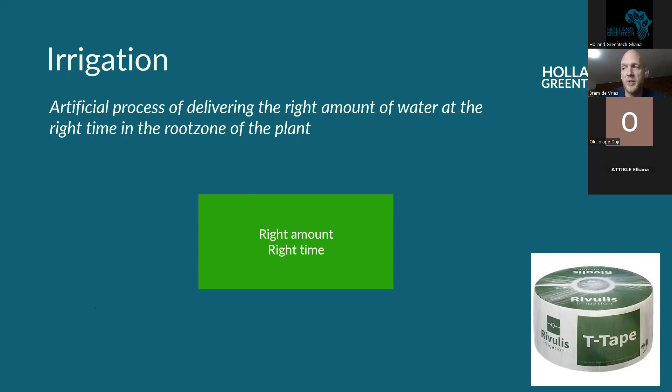So the right amount at the right time, that's where efficiency and scheduling is coming in. So if we look at how the soil reservoir works, we see that the plants have roots which are in the soil reservoir. The volume of the soil reservoir depends on the crop stage, and basically the rooting area. So the deeper the roots, the bigger the reservoir of the soil where the plant can consume its water from, and that's where the plant gets the water.

Then water can also be lost by evaporation. So when you wet the soil and the sun starts to shine, the more area is wet on the soil, the more water will be lost because of evaporation. Then with some forms of irrigation, like furrow irrigation or basin irrigation, you can also lose water with runoff. Water can just flow from the surface out of your field, so it will not be accessible for the crop anymore. So that is another way to lose water that you try to add to the root zone of your crop.

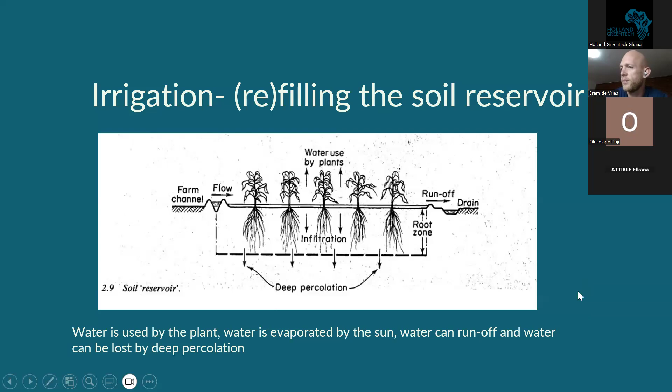So irrigation, why does the plant need the water? The plant needs the water for transpiration. Just like people, plants also need to sweat to control the temperature of the plant. Photosynthesis, of course, and growth. The plant itself holds water, so the bigger the plant grows, the more water it will hold. It's also structural support: the turgor, the cells need water for structural support. That's why, if a plant is drought stressed, you see the stems and the leaves start to bend, so they don't have enough structural support anymore.

An important one that should not be underestimated is the transport of nutrients and gases in the plant. The plant needs water to take up the nutrients from the soil, like your nitrogen or your phosphorus. Flow of water from the roots into the plant, into the leaves, the fruits, the flowers, etc. is needed. So a shortage of irrigation can also lead to a deficiency in nutrients.

So transpiration is the biggest contributor to the water consumption. This really controls the flow of the water through the plant, and is the biggest one. So a healthy plant needs to be able to transpire enough water.

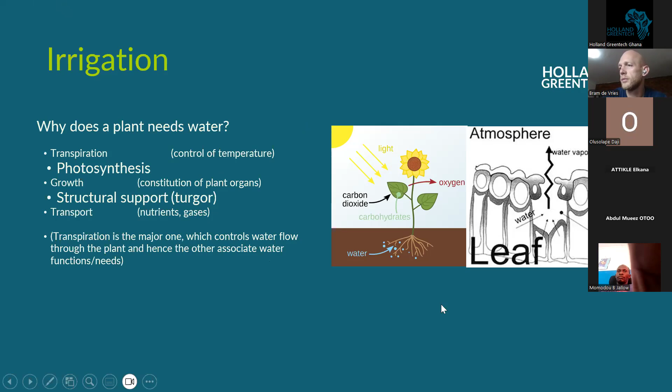Sometimes the presentation doesn't continue with the screen, so I hope you're now on the slide of too much water. Otherwise, I have to start sharing my screen again.

So too much water. It's also possible to irrigate too much. We see it a lot with farmers we visit, also with drip irrigation. So what is the problem if you irrigate too much? One, it's of course water loss. If you have a farm with limited amounts of water and you irrigate too much, it's a loss of your water. But it's also an energy loss. You may use electricity or fuel to pump water onto your field, so every cubic meter of water that you lose is also a certain amount of money and energy that you needed to get that water there. This can be quite significant.

Too much water, you have leaching of nutrients; especially nitrogen leaches quickly. So this is also a loss of money. You don't want your expensive fertilizer, or the nutrients that are already in the soil, to leach out. You have more risk of diseases, especially in the soil, so fungal and bacterial diseases.

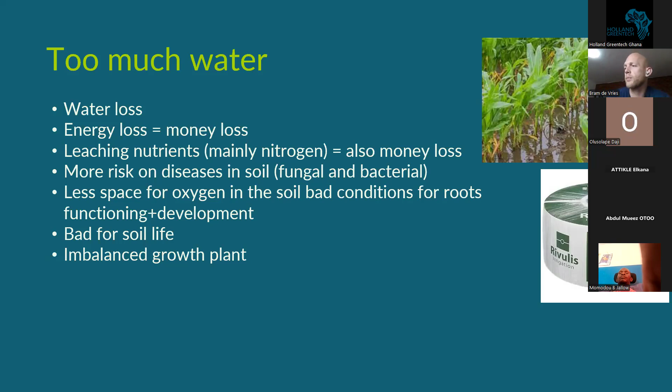Now, if there's not enough water, the plant will be stunted. You have small leaves, you have a weak stem, the root system will not develop well. So a weak plant is also more prone to pests and diseases. Just like as human beings, when we are strong and healthy, it will also be harder for a virus to make us sick.

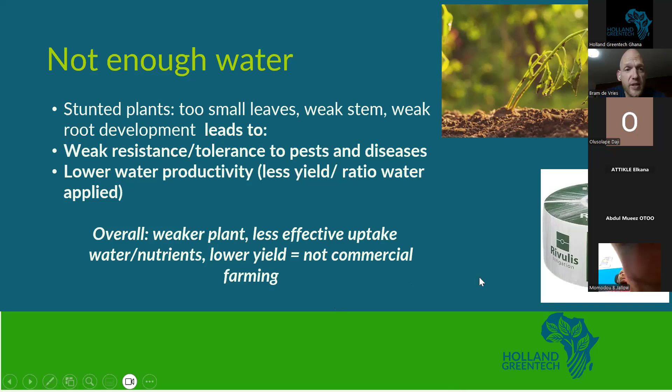Also, the water productivity, so less yield compared to the ratio of water applied, would take place. So overall, a weaker plant, lower yield, and you would not really do any commercial farming. So if you want to irrigate efficiently, which is one of the topics of this webinar, we need to know how much water the crop needs. There are different ways how this can be calculated. I'm not going into too much detail of this. We don't have time for that, unfortunately.

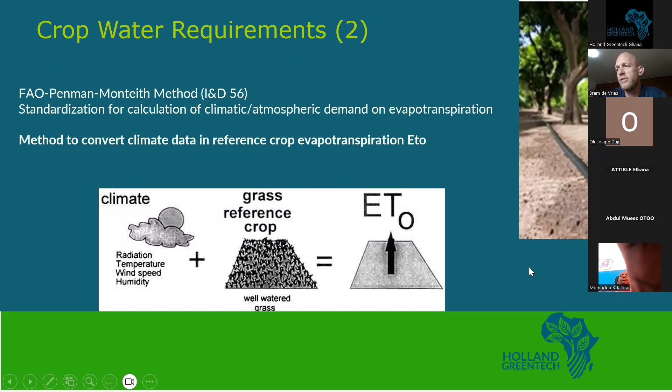But one method which is defined by the FAO is one of the leading methods that uses a reference evapotranspiration. So it uses a reference evapotranspiration of like a grass that scientists tried on different places in the world, depending on the radiation, temperature, wind speed, and humidity. And then when you know the reference ET, sometimes with a satellite, for example, you could get that, or with a weather station, you can get that.

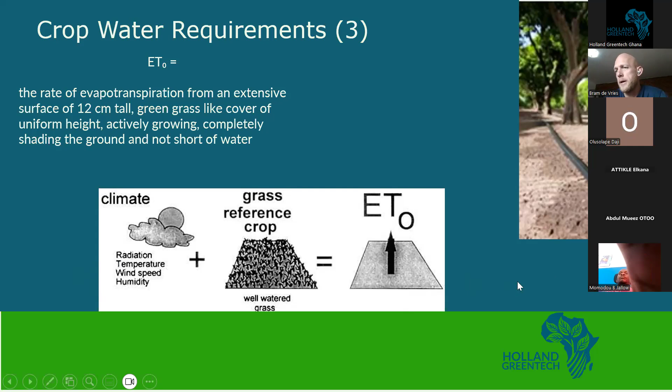You can make this crop specific by multiplying this with a crop specific factor, which we call the KC factor. So that's a crop specific factor. And so the ET0 is not dependent on the crop, that is just dependent on the environment. Then if you multiply that by the KC factor, we get the evapotranspiration.

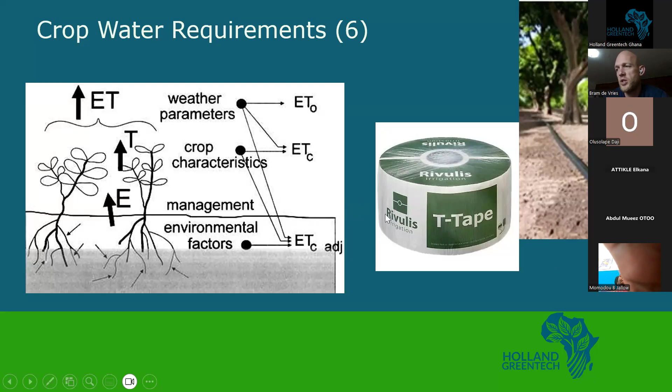So if you look at information on irrigation and you find something like ET, it stands for evapotranspiration. So if it says ETC, the C stands for the crop. So that's crop specific evapotranspiration. Here we see that formula, the KC factor times ET0. The reference crop makes the ETC, which is the crop specific one. Then we know how much water the crop needs. There are also other ways to determine your irrigation scheduling. Come back to that later.

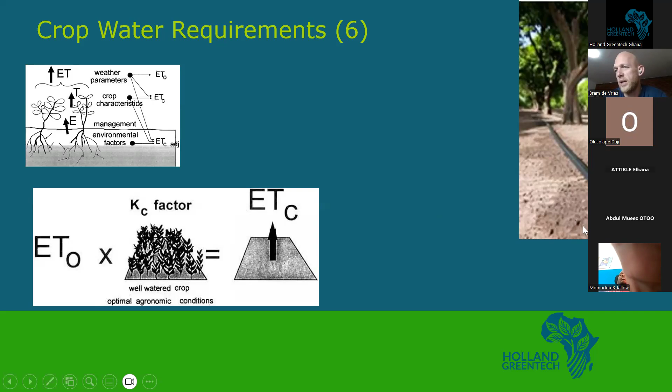So if you are interested in this, you could download this FAO drainage paper number 56, and the whole method is described in there. CropWat is a free, quite easy to use software that you could also use to calculate the crop water requirements. So you could also look for CropWat 8.0, and it's free. It's a bit of an old-fashioned program, but it works quite well. I'm not going into detail here.

So we can just look at a few practical examples. For example, tomato. How much water does a tomato plant need? You would look at the different stages, like it's a seedling stage, the plant is in a development stage, or in a full-grown crop, or it's in a late stage. That's basically when you're harvesting, or when the crop is really almost coming to its end.

So you see, of course, that when it's a seedling, it needs much less water than when it's a full-grown crop, up to 2, 3, 4 times more water is needed when the plant is fruiting, and when the plant is producing. That's when the plant needs most water, and it depends, of course, on the weather, the climate.

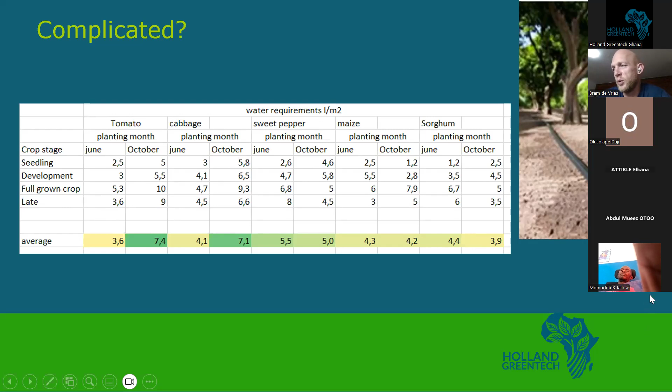A good one also to realize is that with irrigation, we often talk about millimeters of water. So 1 millimeter of water is the same as 1 liter per square meter. I don't have time to go into the details of that, but trust me on that one, that 1 millimeter is the same as 1 liter per square meter. So if we know the crop water requirements, we now come into the efficiency. So we have to look at what is the efficiency of your system.

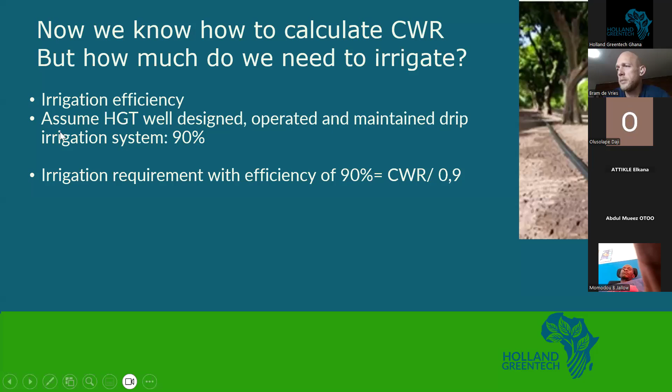So if you use, for example, flood or furrow irrigation, it's of course much less efficient. So efficiencies in practice are between 30 and 60%, which is really quite low. Imagine you're pumping water and only 30% or 40% of the water ends up in the root zone. That is the definition that we're using here for the efficiency. So from your water source, what ratio of the water that you, for example, pump ends up in that root zone. So it can only be 30 or 40%.

50% is already quite a well-performing furrow irrigation system. Okay, most of it will be lost by runoff and by deep infiltration. Then we have sprinkler irrigation. Depending on the setup, you can reach efficiencies of around 70%. A bit more or a bit less is also, of course, possible. And then we come to drip irrigation, which is the most efficient system when it comes to water and also energy, where you can usually reach an efficiency between 85 and 95% if the system is operated well.

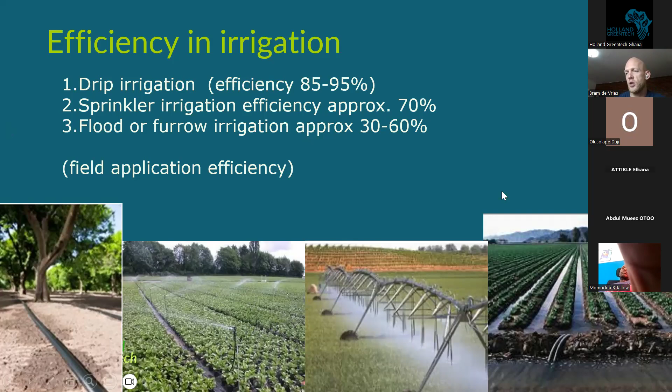So now I want to show you a video about the technical functionality of a drip line. A drip line is much more than just a hole where water flows out.

So I hope that the sound will also come with you. Maybe Elvis, you can confirm if I press play, if you also hear the sound. If not, I will explain it myself. Hello, Mr. Brown. So can you hear the video? No, there is no sound. Okay, but you can see the video? Yeah, we can see the video. Okay, then I will just explain the video myself.

So here you have the inside of the drip line. So you see water, but you also see very tiny particles that still manage to go through the filter that you have in the beginning of the system. And now you see here these black dots. That's basically a secondary filter, which is in each emitter; the water first needs to go through this secondary filter.

So you see most particles will not fit through this filter, and it will just flow further and further. You see in the T-Tape we have a very big filter area. So even if 90% of the filter is clogged, still enough water will reach the labyrinth. So here we have the labyrinth.

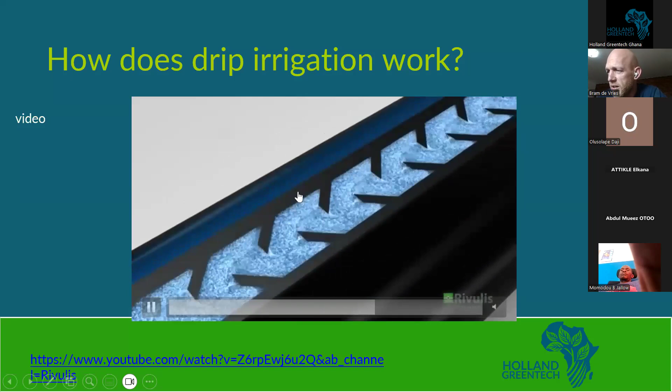So you see that the water gets very turbulent, like it's flowing more like a rapid in a river, and that makes sure that also the particles in the water cannot clog that. It will just keep going, and also it will reduce the pressure, so the water will just slowly trickle out, and it will not flow out too quickly, and make sure that out of each emitter the same flow will come out.

So now you see the outlet, which is a slit here; that's where the water gradually trickles out from. The slit also has a bigger area, so that makes it more clog resistant. So that is the technology: every drip line should have a small filter, a labyrinth, and the outlet. So those three items are included in a drip line. And with the T-Tape, you really have a drip line which is designed to be the most clog resistant drip line on the current market.

So why would you want to go for drip irrigation? It's optimal constant water distribution. It has the highest water efficiency. Small water applications are possible, so you can have a short irrigation interval. Every day you can irrigate, or twice a day. The crop itself stays dry. That's a key advantage, especially in a country like Ghana, where there's high humidity.

You don't want to wet the leaves and the flowers and the fruits every time with water, like you would with an overhead sprinkler. So it reduces the pest and disease pressure a lot. It's very suitable also for fertigation. I'll show you another video about what fertigation is and how you can do it. It requires relatively low pressure, so you need less energy from your pump.

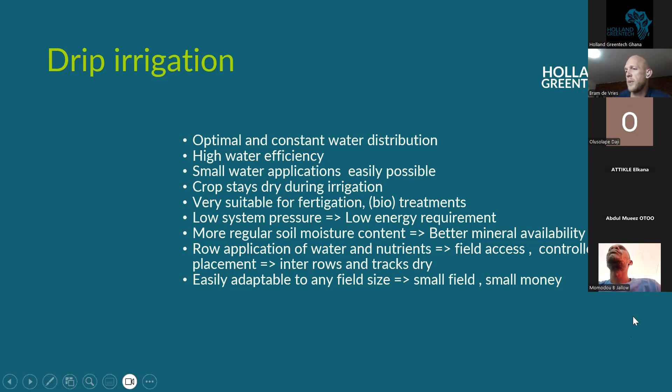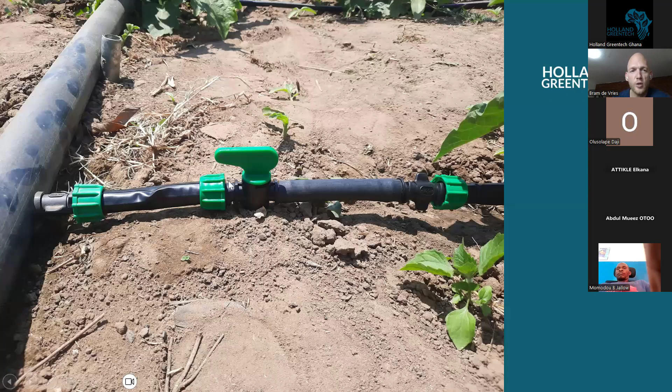You can dig the polypipes into the soil, or you could also leave them at the surface. The disadvantage of leaving them at the surface is that the sun will slowly deteriorate the materials, and the water in the pipe can become quite hot. But burying it also requires a bit more labor. So that's a choice for you.

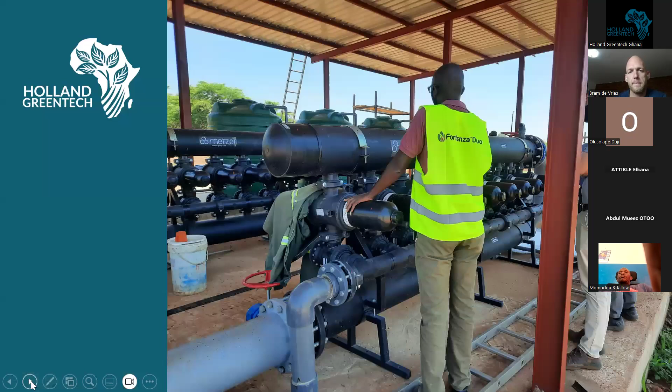Hello, Bram. No? Please, come again with a question. Come again with a question. Can we see on this picture?

Yes, we can see - filters, as someone is replying in the chat. Indeed. These are big filters, big screen filters, part of an automated system for about a 300 hectare farm.

How about this one? It's a bit harder to see.

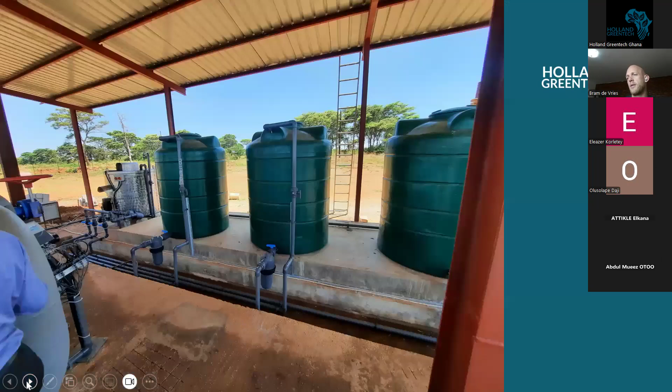So this is part of a fertigation system. Here we see the tanks where the fertilizer are mixed in. We see sand filters there. And on the left, we see the fertigation unit.

This feeds nutrients into the system. This is needed also for big systems like 200 to 500 hectares. This is very effective.

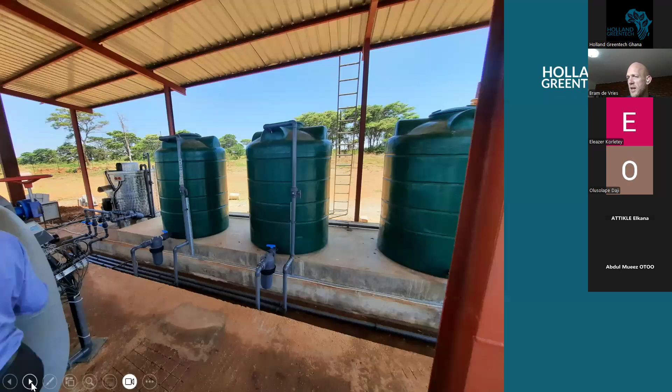So why do you want to invest in a good irrigation system? It has the potential to create optimal agronomic performance, and you need that for your bumper harvest, for more profit, save on your inputs and money.

As a farmer, there are already many risks involved. Don't take a risk of having shortcuts in your irrigation system. It's your safety system, especially with the changing climate. You can't count on rainfall anymore, and you just can't afford the risk of losing your crop because suddenly you have maybe a 2-week dry spell. So irrigation is really your guarantee.

So see it like this: if you jump from a plane, you want to have a good parachute. If you're a farmer, you want to have a good irrigation system.

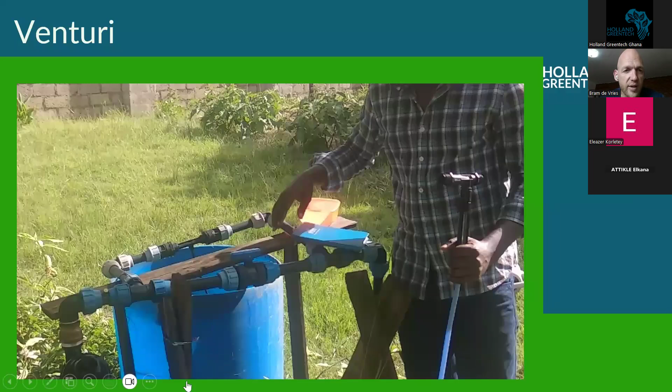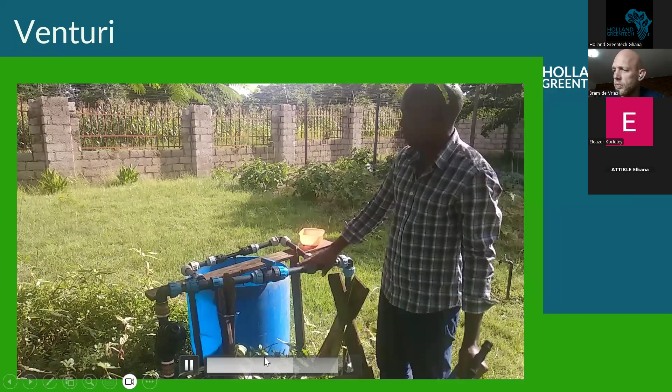In order to do that, you need some pressure difference, so you need to use a pump, the same pump as you always use. You close that valve a little bit, water starts flowing through the bypass, through the Venturi, and then the pipe will start sucking up the water. So for this type of Venturi fertigation system, you don't need an additional pump or an expensive fertilizer tank or anything.

Just for maybe $200, you can be done, and you have a very efficient system. And you can save on a lot of labor. As you know, farm workers don't like to add fertilizer into the field, so sometimes they broadcast it or don't put it properly next to the plant. Then you lose a lot of money, or fertilizer doesn't reach the place where you want to have it.

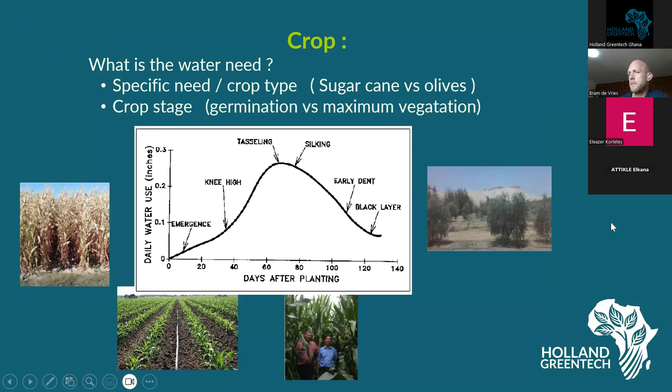The different components we can help you with selecting are like the pump, a filtration system. We need a good filtration system for a drip system so your emitters will not get clogged. We need to know the right size of the pipes, the submains, so those are the pipes going to the different fields. The manifolds, we call those the pipes where we connect the drip lines to, and then at the end we have the laterals or the drip lines.

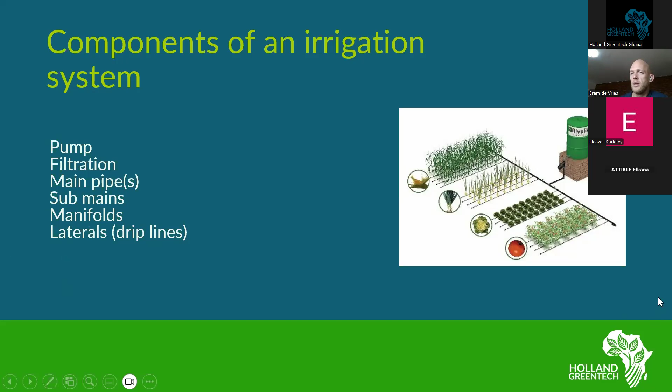Another important point of discussion is the lateral spacing, so what is the space between one drip line and the next. Usually it's good to choose a focus crop and say, okay, this crop is very important for me, for example habanero pepper or carrot. Then you select what is the best lateral spacing for that, and compare that spacing with other crops that you want to use in crop rotation, and see if you can make some adjustments. You can accept that in some fields, at some seasons, maybe for onion, it's a bit less efficient, with a bigger space of land where you don't grow anything, compared with maybe habanero pepper, where you see a whole canopy coming. So you take your crop rotation into account, please.

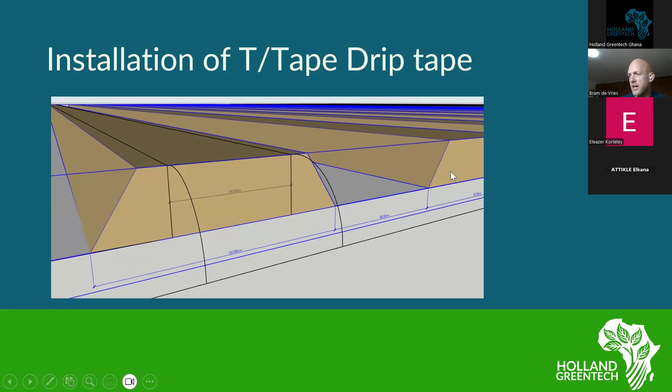This is what we mean: you would have a bed and you would put one or two drip lines on the bed, and then you have the next ridge again.

A little bit about pressure: the higher the tank, the better when it comes to pressure, because 1 meter equals 0.1 bar. So if you have a tank 5 meters high, you would have 0.5 bar. That is usually quite nice for, for example, 1 acre or 2 acres of irrigation. But 1 meter is really not advisable, because the pressure in your system will be low, and the uniformity and efficiency of your system will also be low.

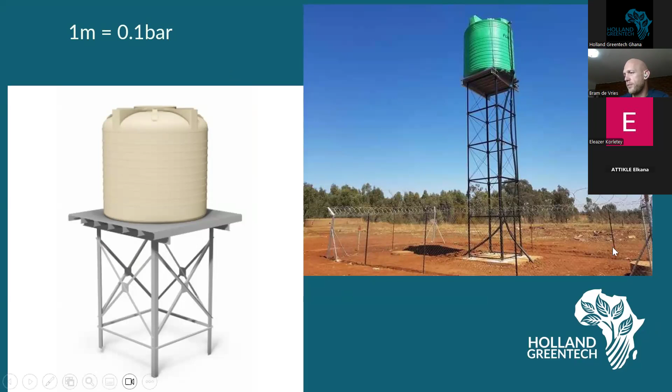When you select a pump, also please look at how much water this pump is able to pump up in a day. So determine how many hours per day can I pump. So maybe you only have 8 hours per day electricity, so you can only irrigate 8 hours per day. So calculate then how much water do you have.

So for example, if you have a pump with a discharge of 0.5 liter per second, that means that you can pump 1,800 liter per hour. So if you would pump for 8 hours, if that would be the max you can pump on a day, you can pump 14,000 liters on a day.

This is something I would really advise you to know. How much water can you pump up on a day? Because that will tell you what is the right size of irrigation system that I can use. Because, for example, with the 0.5 liter per second and 8 hours, that will not be enough for 1 acre. It will be enough for roughly half an acre, but don't start going for 1 or 2 acres. You will just not have enough water, and your crop will not do well.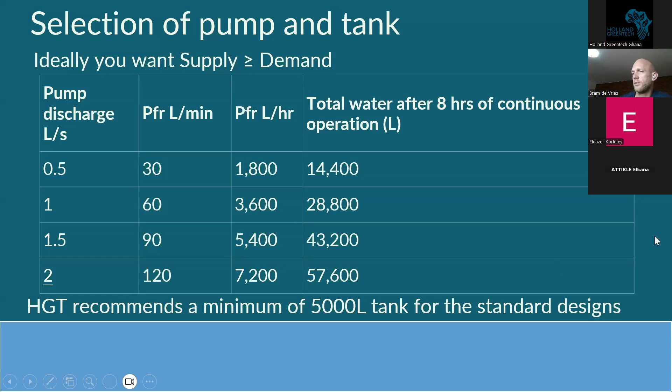If you use a pump and you know the flow of your pump is really good, it's possible to irrigate multiple zones at the same time. If you have a very powerful pump, it might even be a problem if you only open one zone because the pressure there might increase too much and the system will also not like it too much. So match the flow of your pump with the flow of your irrigation system.

Okay, there's a question here. What is the difference between a zone and a shift? For me, a zone is like a field that you can irrigate independently. So, for example, with one valve, you open it, and then a certain area is being irrigated, and that is an irrigation zone. A shift, I think maybe you mean an irrigation shift, like maybe from 12 to 1 p.m. you have an irrigation shift. Is that what you mean, Prince?

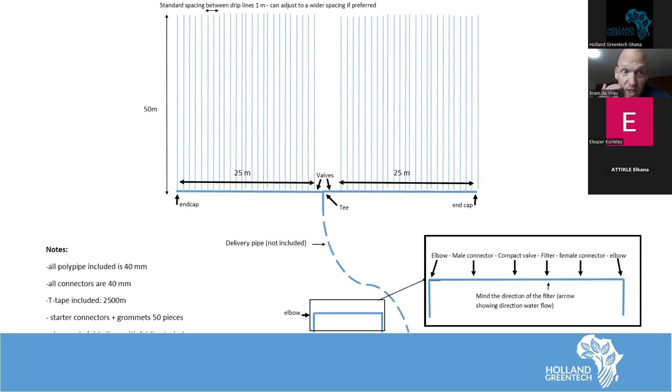So then the sum of the flow of one shift needs to be the same as what the pump can deliver at the right pressure. So that is only applicable for systems with a lot of zones. Let's say more than 4 zones or 10 zones or 20 zones. Then you look at what shifts do you have. So for a small field like this one, you could say you have 2 shifts. Shift 1 is zone 1 and shift 2 is zone 2. Then there would not be a difference in a small system.

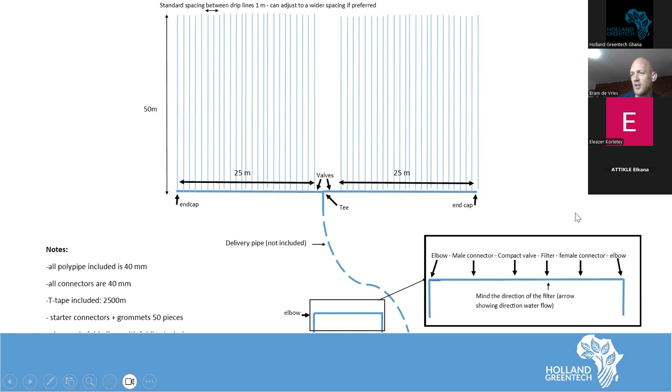So why would you want to have different zones? One, your pipe sizes can be smaller. So you save money on pipe sizes. You do need to buy a little bit more valves, but in a hectare situation, you would save money.

You can have more planting dates. It's easier to plant in different stages, like every week or every other week you plant the next field, so you have a more consistent supply. It's usually not very nice to grow, for example, 1 hectare of cabbage where all the cabbage is ready at the same time. You have a nightmare in logistics. The price at that point might just be low, so it's better if every 2 weeks you plant a quarter of a hectare. You would have a more secure business case.

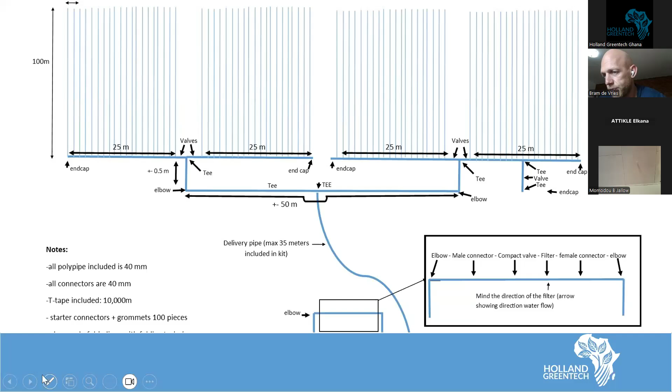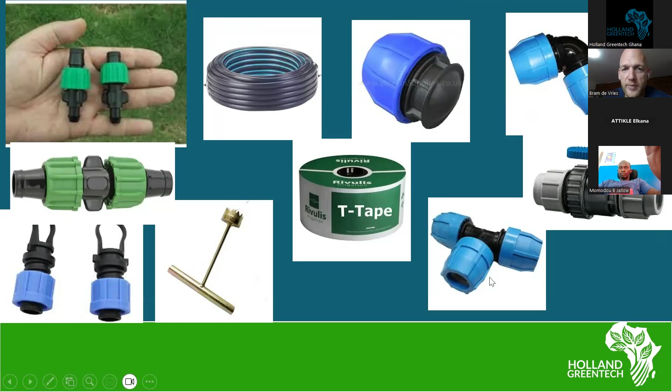These are mainly the HDPE components, but we can also make the system with a PVC pipe. You can always make a sketch of how your system looks. This is also a simplified system, a gravity system. Okay, so these are T-tape systems. So what are some take-home points to improve efficiency?

Check and clean your filter. I didn't talk about that important thing yet. If your filter is clogged, it really reduces the pressure and the flow in your system, and this makes your system less efficient. So not all the drippers will release the same amount of water anymore. If you never clean it, at some point no water will come out at all.

But do weekly checks, or maybe even 2 times a week. I would always say, clean your filter on Monday. It's a good start of the week, to make sure that you don't have unnecessary pressure loss and uniformity problems in your fields, which lead to you not getting the right amount of water at the right time to your field. So regularly flush your system: open the drip lines at the end on a regular basis.

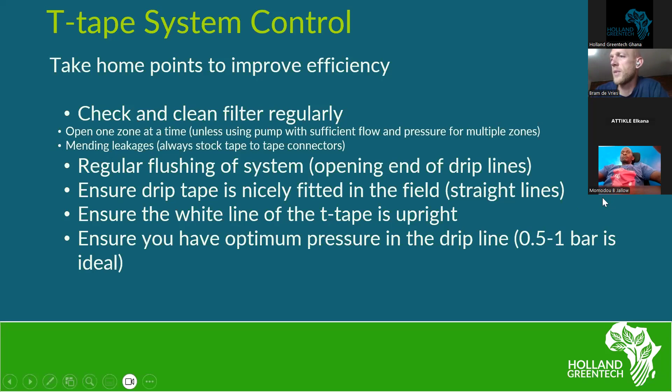All right, then we come to the part of irrigation scheduling. So irrigation scheduling, what does that basically mean? When are you going to irrigate, for how long, and with how much water? That's irrigation scheduling. So you have to make your irrigation schedule, and to do that you can use different tools. One of the tools, which is the cheapest and available for 99% of us, is your

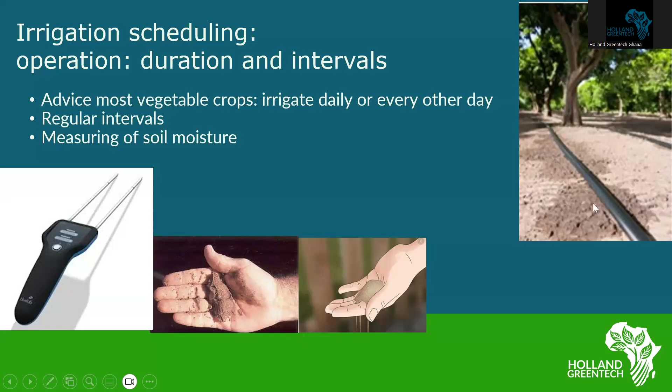So if we look at the smart irrigation system, what is a smart irrigation system? For me, a smart irrigation system is when you have tools that can help you with water scheduling. You have efficiency of your irrigation system and the pump, and you could also think of something like water level monitoring and having good insight availability. In order to do that, you can make use of sensors.

What can you measure? Soil moisture, as we talked about, is the main one, but you can also think about UV, so the light. High-tech farmers use light sensors to determine how much water the crop needs, because they can calculate with the amount of light what the photosynthesis and the evapotranspiration of the crop will be, and they determine their irrigation scheduling based on light. You can think of pH values of your soil, but also of your water. So there are a lot of things you can measure. If you don't measure anything yet, I would say start with soil moisture, which is the most important in most cases.

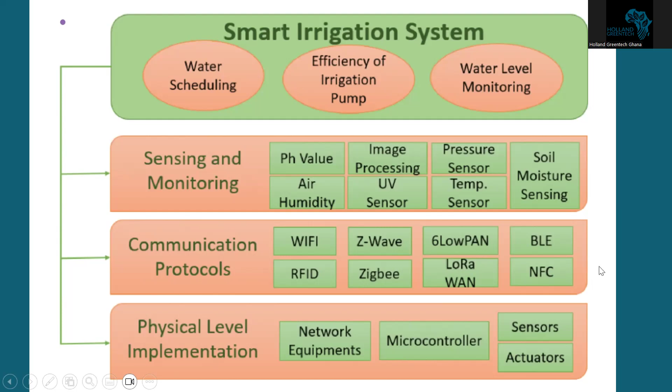And then the physical level, that is the automated valves, controllers, and fertigation systems, I think, also fall under that category. So for me, if we look at smart irrigation, you can look at different topics. One is monitoring and decision support. I think that is the lowest hanging fruit for most farmers to get more guidance: how's it going with my farm? What do I have to do? What data to base decisions on, instead of just gut feeling, like, today I'm going to irrigate 1 hour because I have the feeling I have to. You can think of remote sensing, so satellite-based or drone-based information.

Another is precision irrigation that really has automated filters, for example, that you can install in your system. And the fourth one is the more emerging, very innovative water smart solutions like laser guided solutions that can help you to give information on irrigation.

So these are very novel technologies that as Holland Greentech, we keep a keen eye on, like what are the newest developments, and we can help companies test those technologies, and then we can assess, is this actually practical for the farmer? Does it have added value for the farmer? And if so, we can start, for example, working together with those suppliers to stock those new solutions. But we can also say, well, maybe in a few years this will be a good solution, but you first have to do a little bit more research and development to make this a practical solution for farmers.

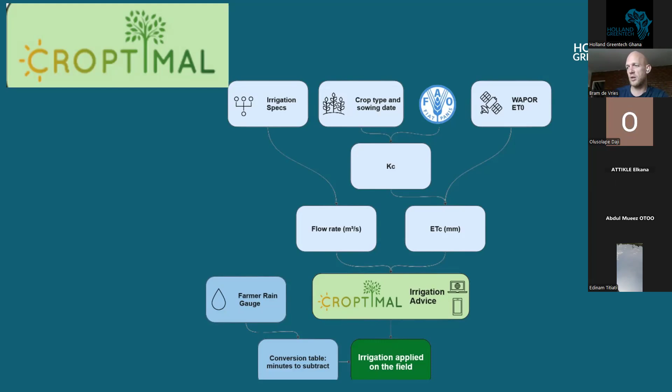So I'm going to try to now share another screen. 1 second. Okay, I believe you can now see my new screen.

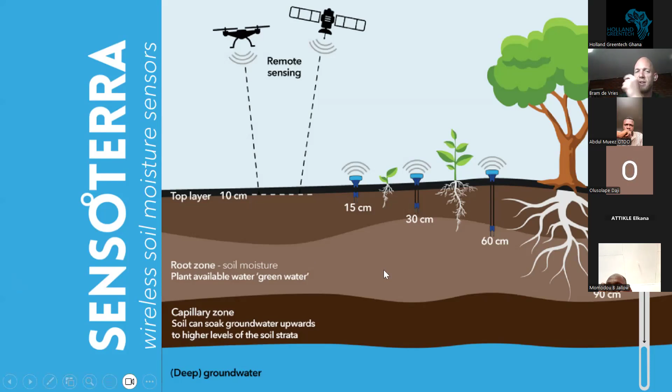For this technology, you need a LoRaWAN network on your farm, which costs around $800-900. So this is a solution you usually use for more than 2 hectares, with multiple sensors. Once you have the network, you can add as many sensors as you want. Usually I would say put 2 per irrigation zone, so for each zone you always know the moisture level.

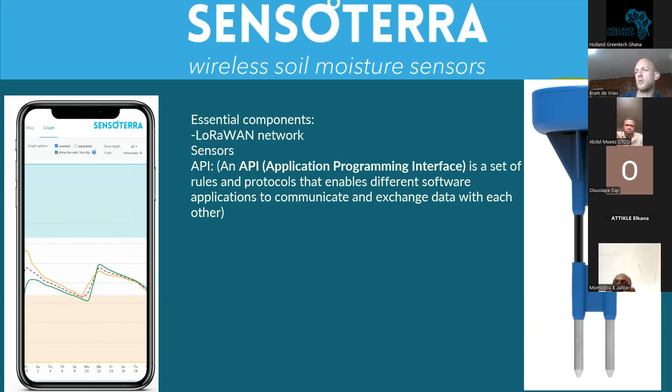Then another solution here is Quantified, also a nice company that developed sensors for greenhouses and for the open field. This one uses a 4G SIM card to send data to the internet, to the cloud, and then you can access the information on your phone. They have weather stations as well, so you can add weather station information, soil moisture information, all of that into one app that you can access.

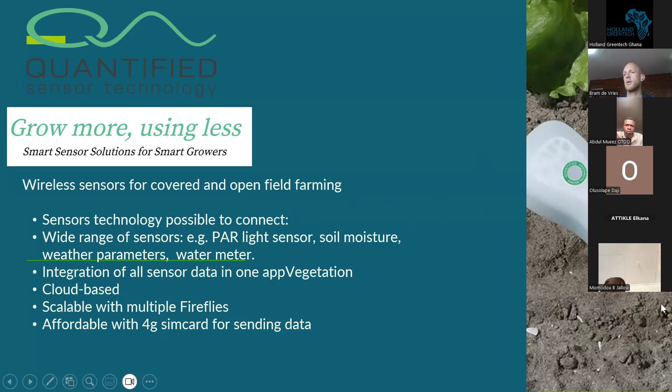It's a bit cheaper because you can use a local SIM card, like a Ghanaian SIM card. You put it in the system, you just need to buy some bundles now and then, and the system will work. We can also provide this for you as Holland Greentech.

Some examples of sensors—this is a sensor, also good in soil media. You can measure the EC as well. Links to the website can be found in the slide. This is the Firefly, the module it's connected to—that's the node that gets the information from the different sensors, combines the data, and then sends it to the cloud.